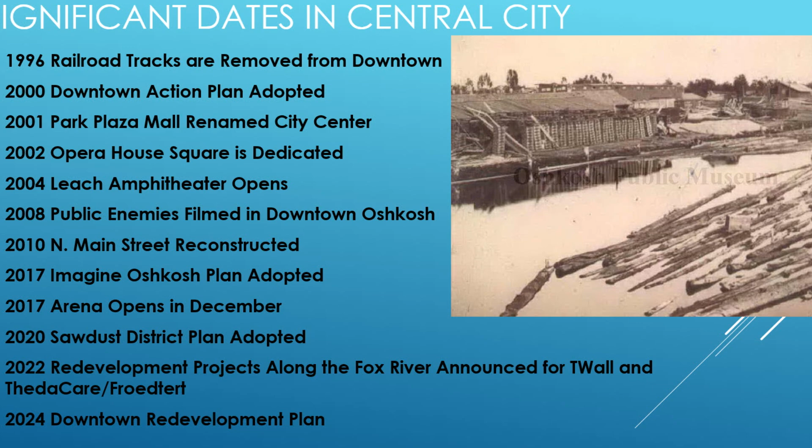2000, that downtown action plan was adopted. 2001, Park Plaza Mall got converted over to City Center, going from that mall to that office complex. Leach Amphitheater in 2004. 2010, the North Main Street reconstruction. 2020, the Sawdust District plan. 2022, some of the large redevelopment opportunities along the river with T-Wall and the hospital location. And then obviously 2024, we're starting this redevelopment visualization plan.

We specifically wanted to look at the successes of the 2000 action plan. These are all projects that were specifically called for in that 2000 action plan that came to fruition, which has led us to wanting to do the new plan. We've accomplished a lot of that old plan, and now we want to see what are some opportunities for the future. So that plan called for the Riverwalk, and you think about just the sheer amount of work and improvements

that have taken in the Riverwalk. The 100 North Main Block redevelopment, Leach Amphitheater we talked about. That Marion and Pearl redevelopment area, after almost 25 years, most of it has been redeveloped from old industrial. Jefferson and Parkway, which you're actually going to have a workshop on later tonight, all the way back in 2000 was talked about the need for redevelopment of that site. Opera House Square redevelopment in 2002. And then again, the hospital location was, 25 years ago, that was called for a redevelopment opportunity.

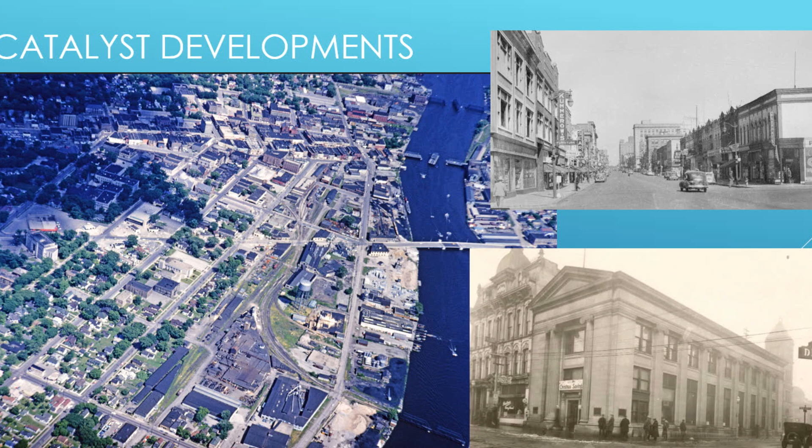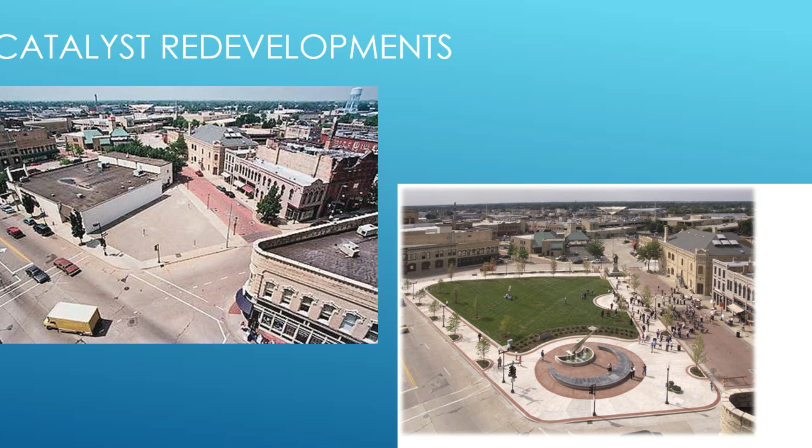Just some catalyst redevelopments from downtown. We're looking at the Marion and Pearl area, the 100 North Main block. What it looked like, in history of Oshkosh versus what it looks like today. Specifically, Opera House Square with what was there with the parking lot in the building versus Opera House Square that exists today. Leach Amphitheater and the utility site that was there versus what's there today with that facility. 100 North Main block, like to talk about what was there versus the building that's there today.

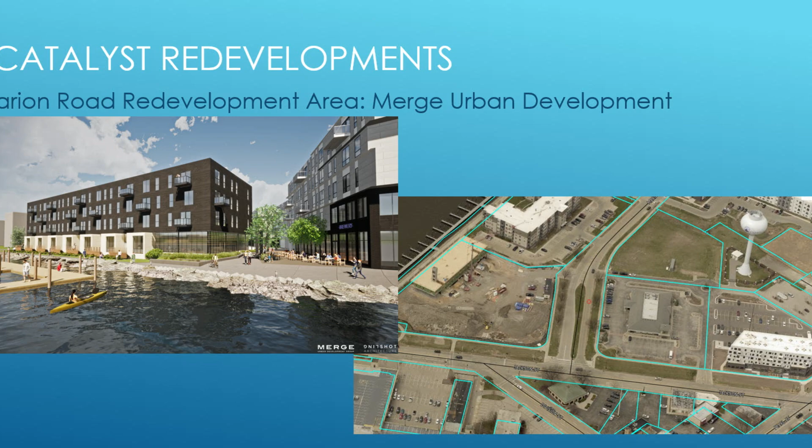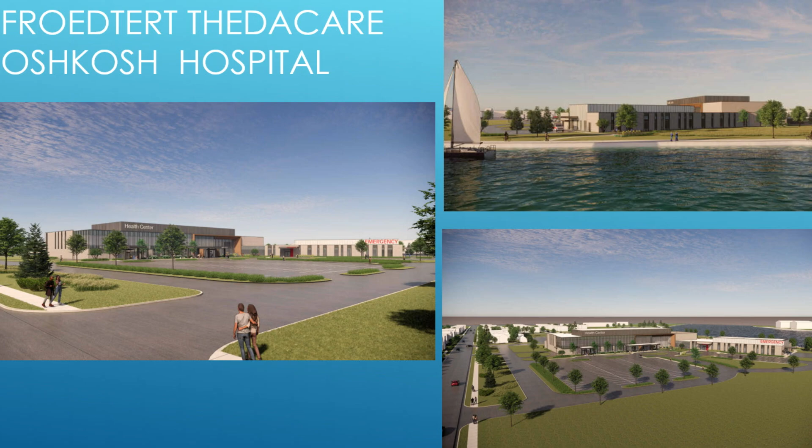This is just a general shot of that Marion and Pearl. Again, it's all industrial versus today. Now a lot of residential development has taken place in those areas. I mean, you can see the coal piles even still there in this photo. And now you've got some of that Merge redevelopment with the Max and Corners building that sits right along the river. You've got the Brio building where the food co-op is further up the corridor on Jackson. Obviously, the Jeld-Wen Door facility that was on the south side of the river versus the ThedaCare facility and Froedtert that's currently under construction. So a lot of redevelopment has taken place since that 2000 plan.

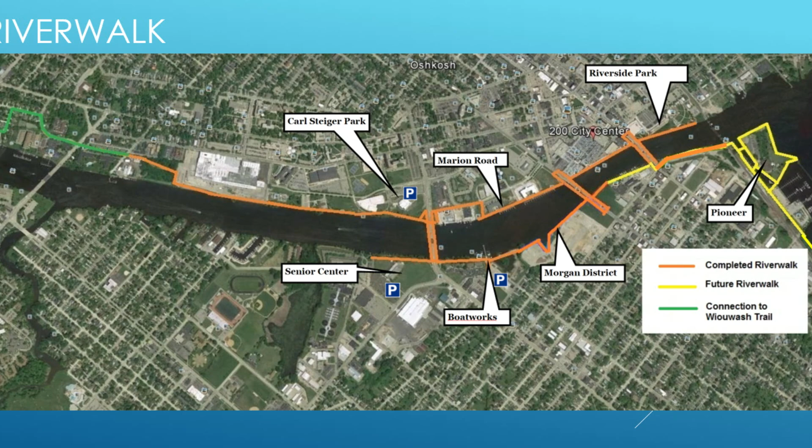The Riverwalk and just the amount of effort that's been made and improvements been made, and we still have a lot to go. The yellow there is still segments of Riverwalk that we hope to construct at some point to further make those connections. A couple of images for you just of what the Riverwalk has turned into. The corridor plan we talked about, this is that Main and North Jefferson that almost 25 years ago called for redevelopment, and that project is presently proceeding forward.

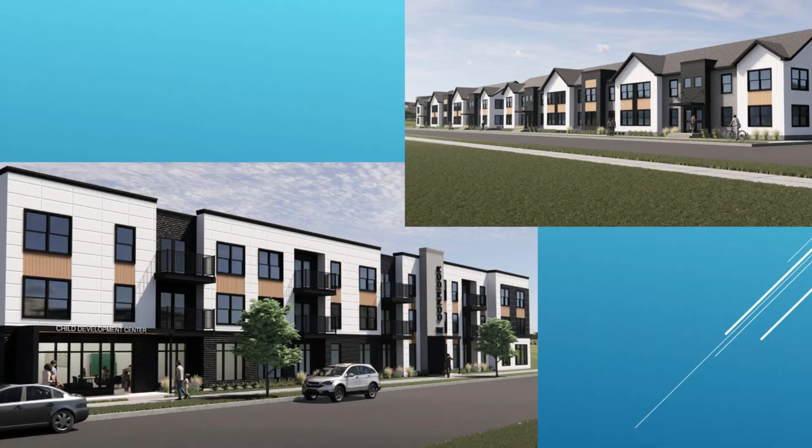And then kind of taking us on to, okay, what are we doing now? So the group came together in collaboration and wanted to look at, okay, how do we take that 2000 plan and what do we show for the future? What's the next set of goals? This is really that. It's a visualization showing, okay, what are some styles and opportunities from redevelopment that could take place downtown? We were looking essentially at the main Jackson area over to where the Leach Amphitheater is, and then north up to about Irving Street. This is the area that was included in the redevelopment plan and that visualization.

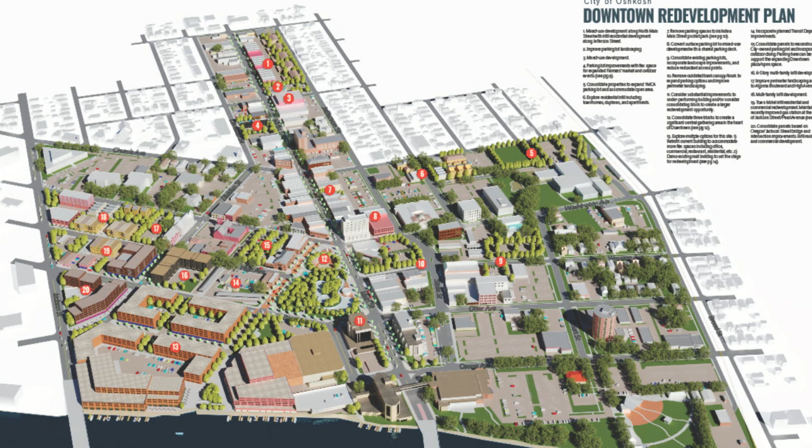This is the main image showing what a revitalized, reimagined downtown could look like. This is not intended to say any one specific of these projects has to go forward in the shape it's shown here. It's really just intended to be a representation of what redevelopment styles can look like downtown. The plan is broken into kind of 3 types of redevelopment that can take place.

Those are from the green sites where it's really landscaping-level improvements. It's taking sites that are very hardscaped, concrete heavy, and saying how can we do some minimal improvements to sites of that nature to make them a little more inviting downtown?

And then it's redevelopment opportunities, like where the corridor is going on Main and Jefferson, or maybe the block just south of City Hall, or some other areas where there's redevelopment opportunities that sit within those. And then it's looking at potential catalysts, and are there areas of

large-scale impact that could have an effect on town if large-scale redevelopment took place. And again, redevelopment doesn't always mean new. Redevelopment can be revitalizing and invigorating what's there today.

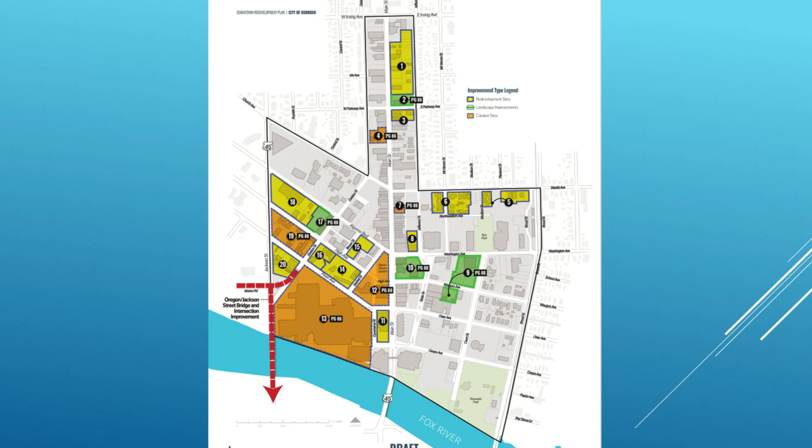A couple of the catalyst sites that really generate a lot of interest shown in this plan are, for example, the expansion of Opera House Square. Discover Oshkosh previously had done the Roger Brooks study, and one of the elements that came out of that study was trying to find a way to have more active space opportunity in the downtown and build a plaza in

the downtown for programmed active activities to take place. This shows one example of an area that could potentially be looked at for that downtown square. It doesn't mean this has to be the location, but it gives an opportunity to put some visualizations out there of what it could look like.

You could have a skating ribbon for in the winter and in the summer. You could have a splash pad. You could have a larger amphitheater. So there's a lot of ways that you can make that public gathering space an active space in the downtown.

To achieve something of this nature, you'd have to buy up a couple of blocks of existing facilities and turn into something. But it just shows that there is an opportunity, if it's something the community and the partner is interested in, to look at ways to add a plaza into the downtown area.

City Center, which is obviously a large development that's in downtown - we talked about the 2000 action plan, how it went from the mall to the office center. And this plan looked at, being such a prominent building in downtown, what are some options you could do if redevelopment was going to take place on that site?

And the plan kind of breaks into 3 options. Option 1, and it could be one of these, it could be a mixture of these options. Option 1 is finding ways to just revitalize or re-enhance what's there today. Continue to be successful in the building as it is.

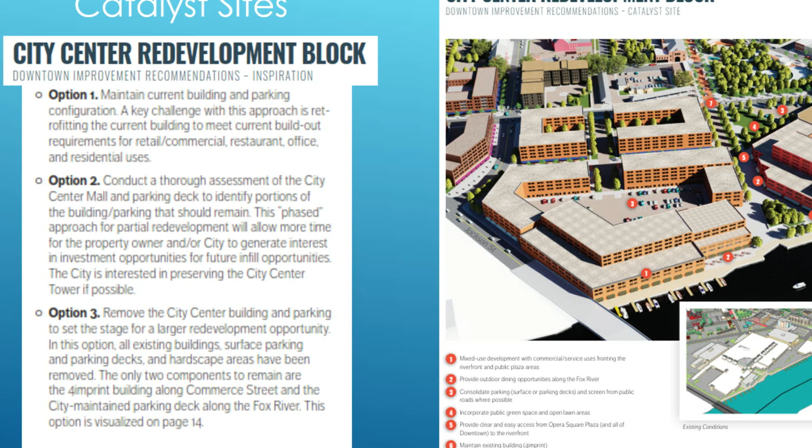None of this is immediate stuff. It's really just saying and trying to identify there are opportunities for the future when they arise, and how do we deal with them when they arise.

Looking at these are some of the landscape improvements the plan talks about - the 600 North Main Street and 300 North Main Street areas. They're both parking lot facilities today that have minimal green space. There'd be an opportunity to add some landscaping, add some green space to just kind of soften the area, make it a little more inviting as part of downtown.

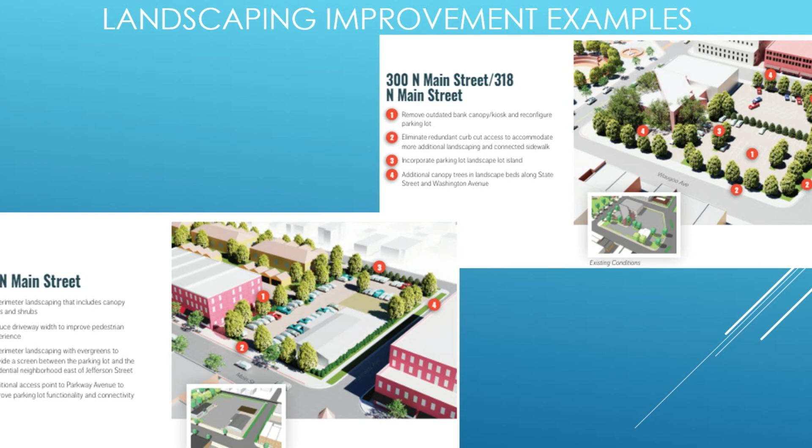Looking at some other redevelopment opportunities or public spaces, one takes a look at that small parking lot just north of Gardenias and says, it's only a couple of stalls, it's not highly utilized. Is there an opportunity that you could convert that to a small public gathering space?

Maybe some seating or something that could complement the downtown. You think on Saturdays, when it's an active downtown, could you have some seating or inviting area for people to hang out downtown? And then, talk about the Town Motel block.

I know that's been a block that's been highly discussed for a long time, and what could redevelopment look like of that entire block? Could it look for more mixed-use office, commercial-style development?

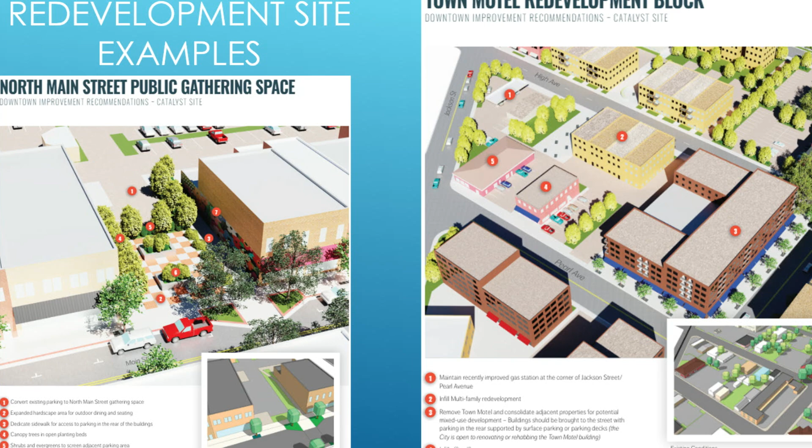So just kind of talking through what's been going on. We started this back in June with presentations on a lot of the partner organizations, the chamber, the foundation, all of those. This got pushed back a little bit just because of timing, but there was a stakeholder group involved at the start that we'd like to present to, see what they think of the outcome of the plan they were involved with early on.

And then it's starting to look at, are there short-term and long-term priorities of the city, of our community partners? Are there projects or elements in this plan that they want us to start investigating further?

And then starting to look at what are those partnerships. If you think about Opera House Square, the Leach Amphitheater, that is an example of a really nice public-private partnership. The city got involved in acquiring the land because the seller wanted to get it to the city. The chamber and the foundation helped fund building what that facility eventually turned into. So where are some similar opportunities for that public-private partnership to achieve some of the goals in this plan?

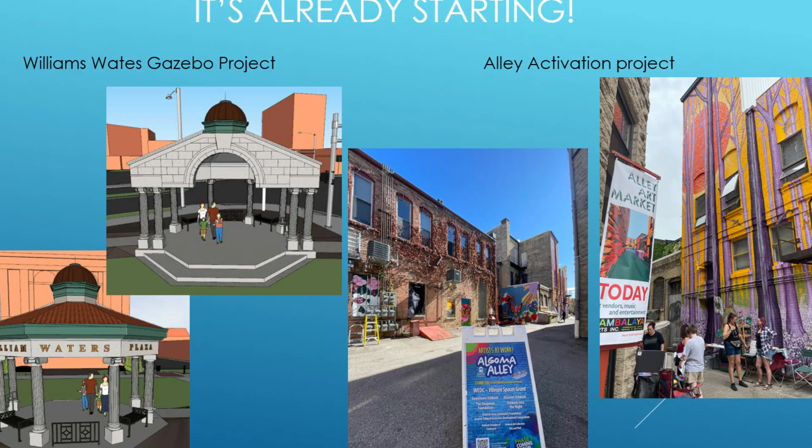Finally, I don't like to end on just what could be done. I want to talk about what is happening. So here are two projects that are already ongoing, kind of revitalizing our downtown.

The first is the alley activation project by the 400 West parking lot. Those beautiful murals were all installed last year. The BID and the business owners in that area are continuing to look at ways to further activate that alley.

Great project that's ongoing. And then one that's close to me is William Waters Gazebo. We've been working on that gazebo being built for years. It is finally under construction. I'll actually have some of the people involved in the project in the audience today that will be helping complete this project later this fall. We had a donor that really stepped up and supplied a lot of money to build that. So it's great to finally see that vision come forward in the city, and it should be a great asset to the downtown.

With that, any questions?

I just have a comment. So this was presented to council a while back now. I know there were a lot of questions that I got after it was presented, and so I've had a little bit of time to digest it. One of the things, I know, first up, it's awesome. I think it's a great job to give us guardrails on what we want to think about as a city. But if you think about the last time this was done, in 2000, it was 25 years ago. So we had things like 9/11 and the financial crisis and COVID that got in the way of that progress, so that takes a lot of time. And then we have changes in technology like the iPhone and electric cars and AI. So I think what's important to point out is this is looking 25, 30, 50 years in the future, and I like that we have those guardrails. So I appreciate all the hard work, and I know this was a big lift. Thank you.

Okay. The staff report is accepted as part of the record, and please report your summary. Thank you. So the subject site is an industrial site at the southeast corner of Medalist Drive and West 33rd Ave. It has industrial buildings as well as storage buildings that are being constructed per a GDP and SIP that was approved back in 2023.

So these darker gray buildings are the storage buildings. The northeast building was recently purchased by Lakeside Plastics, and they would like to install a loading dock on the east side of the building. So the applicant is requesting an SIP amendment to allow that loading dock access and the additional pavement to it.

They do need a BSM to allow reduced setback to 10 feet, where code requires a 20-foot side yard setback. They're also accessing through a neighboring property, and they have provided cross-access agreement information, so they do have permission from the neighboring property to access through there. They are showing additional arborvitae along that reduced setback to buffer from the neighboring property.

Staff does not have concerns with that reduced setback, as it is abutting undeveloped neighboring industrial land that's, I believe, a stormwater pond. They are also requesting a BSM to allow the reduced lighting levels for that maneuvering area. Staff does not have concerns with that lighting level reduction, as it's only for truck maneuvering to the loading dock. There's no employee or customer parking there, so there's really no safety concerns.

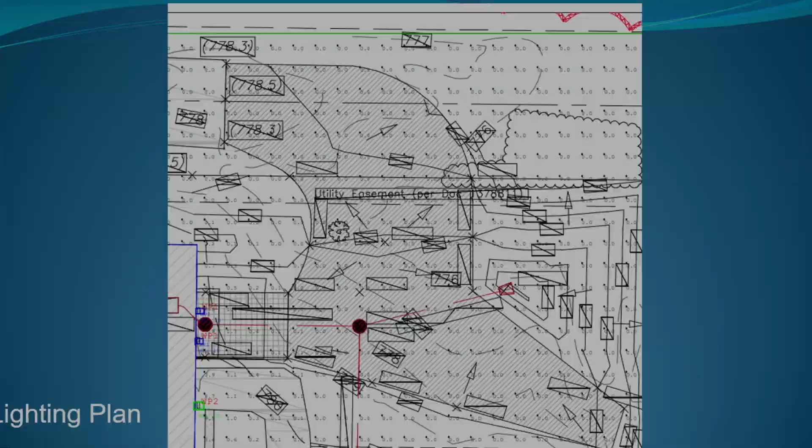Here are the building elevations along that facade. They're just adding 2 overhead doors for the loading dock. Other than that, all the materials are remaining the same and matching what's there. So with that, staff recommends approval of the SIP amendment with the findings and conditions in your staff report.

Are there any technical questions from the Plan Commission? Okay, seeing none, I'm going to open up to public comment and request a statement from the applicant.

If the applicant is here, please approach the podium and state your name and address for our records. Good afternoon, my name is Rick Fisher. I'm with Fisher & Associates Architects. I'm the applicant for the project.

I also worked on the remainder of the site and worked with the development for the other storage units that were built on the site. And so this is a condominium plaza. There's multiple buildings within this overall site. So this particular building on the northeast side has been sold to Lakeside Plastic, which is the adjacent property owner. So this is an extension of their operation.

So as part of that, they wanted to build a new break room space and some other interior alterations, and then add these loading docks.

So the truck maneuvering is not at all anywhere near the public roadway. And we had looked at several different versions of the maneuvering space. We wanted to keep the car parking spaces not in the maneuvering space, because trying to maneuver a truck along with the car is difficult. Worked with staff to look at alternative options to make the truck maneuvering work.

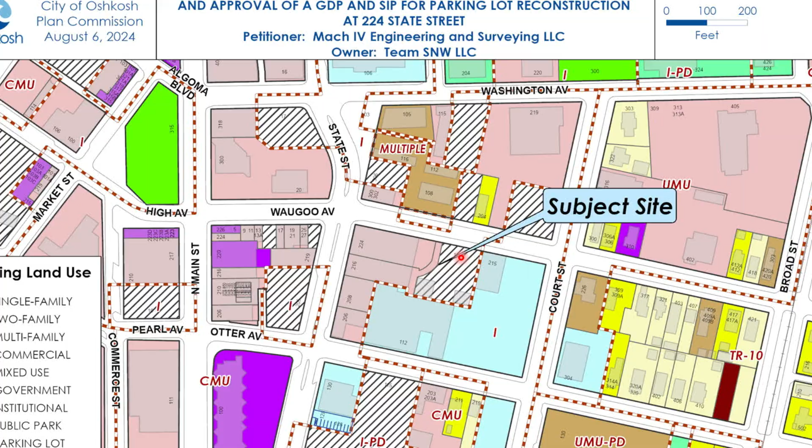So the subject site is located at the southeast corner of State Street and Waugoo Avenue. It has a commercial building, previously the Oshkosh Northwestern building, as well as a parking lot within the site and 2 garage buildings accessed off of Waugoo Avenue. Here's a view of the site.

The applicant is requesting a rezone as they are requesting to reconstruct the existing legal non-conforming parking lot. They're currently in the process of renovating the site at 216 to a restaurant, with future plans for a hotel above that restaurant and on the neighboring building to the north. So they do need that parking lot for the new users.

As the site currently has a legal non-conforming parking lot, to reconstruct it they will need BSMs, so they're requesting that rezone to add a planned development overlay. Staff does not have concerns with the PD overlay, as it will allow them to provide needed parking for the site.

Here's the site plan they provided. It has 31 parking stalls. They are requesting a BSM for a 0-foot setback along the south and east property lines, where code requires a 5-foot setback, and they're providing a 10-foot setback along the front property line, where code also requires a 5-foot setback.

Code also requires a 10-foot buffer yard requirement along these property lines, as it's abutting institutional zoning. However, the applicant is requesting the 0-foot setback. They feel an increased setback to 10 feet from the right-of-way is more appropriate in this case, as it's abutting county buildings, basically right up against the walls of the neighboring buildings, and that would also be difficult for plantings, as it may run into issues with buildings up to the lot line.

So they are requesting the increased landscaping along the front property line instead. They're also requesting a BSM to allow parking row ends without landscape islands, as that would limit their ability to provide the needed parking stalls and maneuvering.

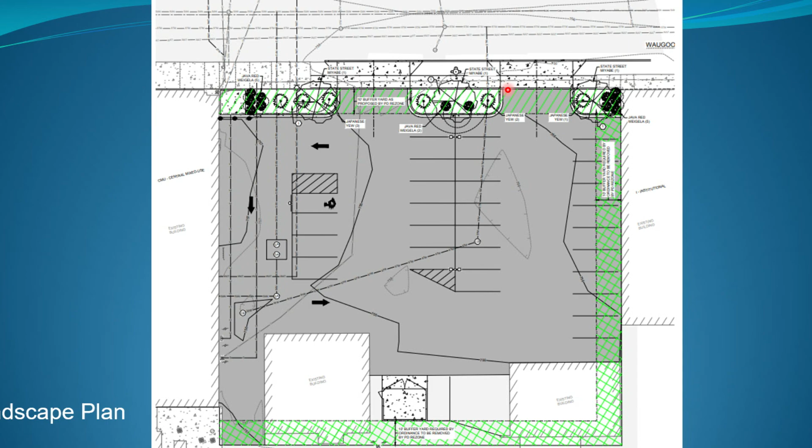Staff is supportive of these BSM requests, as they are providing increased landscaping and increased setback along the right-of-way that will enhance the view of the site from the public right-of-way. So with that, staff recommends approval of the rezone, GDP, and SIP with the findings and conditions in the staff report.

Okay, Plan Commission, any technical questions? I have one.

Is the parking lot here sealing in something? Yes, this is a capped DNR environmental site, so we largely need to maintain a cap here. So this was a fine balance, trying to work with the DNR and the applicants, figuring okay, it's capped, we need to keep it capped. How can we make some improvements and get a nicer, built-up parking lot and get some green space added?

So would that preclude recommending permeable pavers in there anywhere? I would want to work with the environmental consultants to see if that's a viable option, given that it is a cap site. That is typically not done in cap sites. Okay, I just wanted to make sure you'd figured that I asked.

Is the building to the east right up to the property line? Yeah, the county building is pretty much right tight to it, shown here, basically right at that property line. And same thing to the south, that building's pretty much right tight to the line as well, and then the parking lot that way. Are they keeping the existing garage that is there, and is there another building on the corner too? The two existing garages. Okay, they're keeping both of those?

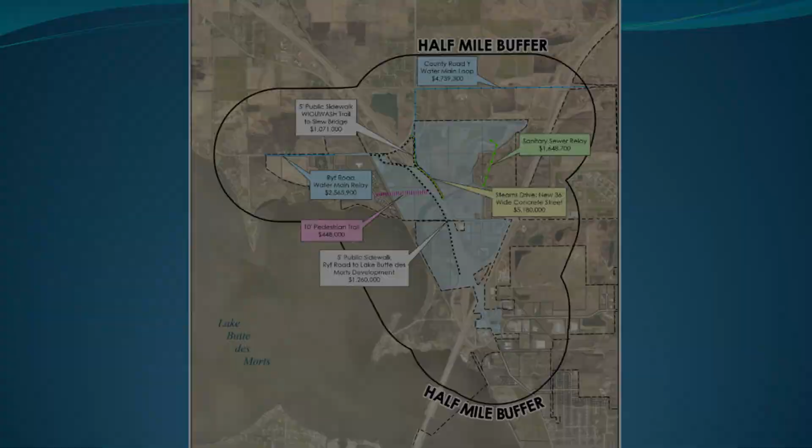It does include improvements within a half-mile buffer, which state statute allows, and that is really to get that water main extension so water can service the development area. Just some of the areas that we know right now are not developing and could develop in the future - again, that area on the northeast side where there's potential commercial development along with multifamily and single family, that industrial area briefly on the south side, and we already have the multifamily project that's going on that southwest side.

So that's the boundaries. The project plan, let me get my computer to turn back on here, sorry.

Identifies approximately 44 million in potential infrastructure improvements that need to take place in that area to unlock full development potential. We estimate at this time that if full development took place, the overall value within the TID could be about 162 million within those properties.

Again, the TID is only within the city. There is no property outside of the city included in the TID, so there's no impact on town parcels. This is a city-initiated project, and TID can only be within property within the city.

Being a mixed-use TID, it has a life expectancy of 20 years. That is the statutory maximum for a mixed-use TID.

Proposed TID is consistent with the comprehensive plans, and I like to always talk at Plan Commission. Remember, when this body is looking at TID, it's looking at it from that context of land use, and is it appropriate based on our comp plan and our long-range plans for the area.

The TID does include a potential for development incentives for developers in the future. However, none are identified at this time. The project plan does not approve any development incentives, so if somebody wanted to do development incentives in the future, they'd have to go back through council and approve a but-for.

Although it's a green line on here, it doesn't mean that's exactly where that would go. We own 62 acres there, so the chances of it cutting through our property right now would be quite high, correct? Right now it ends roughly here, correct?

So if that is going to be extended, and it's going to go, that is going to have to be conversations. You would have to agree to it. If not, we would have to find another opportunity.

So the TID in and of itself doesn't just allow it through your property. So we as property owners would have the right to say we don't want you there. Correct. It's still your property, and those rights are held with you.

That was kind of a concern because we mow 15 hours worth of grass every week, and I was like, oh, what are they going to do to my yard? That is a conversation, and if you disagree with it, it'll have to find a new home. Okay, sounds good. Thank you.

Thanks for allowing me to speak. I'm Jim Erman, I chair the town of Oshkosh, and I'm fielding a lot of calls. People are confused on this issue here.

The TID district is the blue up there on your map. And what's the, according to what I read here, you're changing the

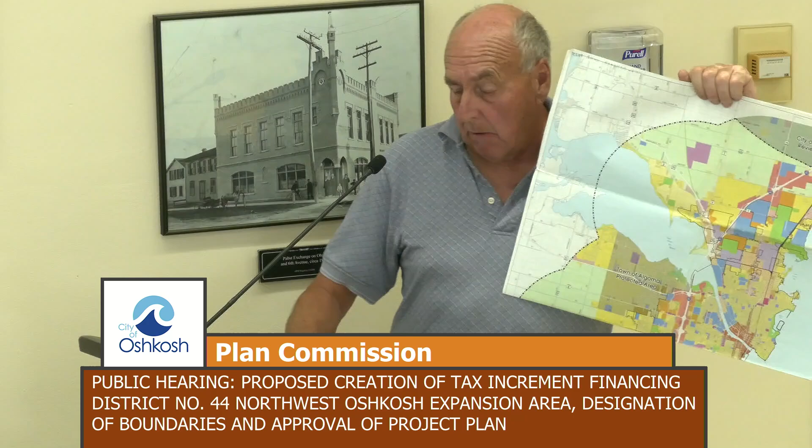So if it, right now, this was an agreement with, this is the city of Oshkosh's comp plan, the town worked with us and took a lot, we worked hard on this. Yep, I was there. You took the town's plan into it a lot.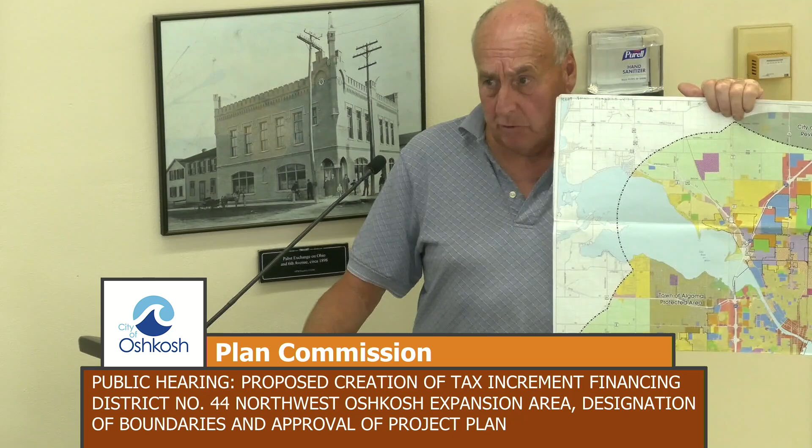So in the future, then this comp plan for the areas in the town of Oshkosh are not gonna change from types of residential to industrial, commercial? Nope, okay. Comp plan will still do its normal thing. This is separate from that, and if someone wants to change any areas in the town, it'd have to go through that normal comp plan process and discussion.

You gotta change the comp plan before you change the zoning. Correct, yep, and this doesn't affect zoning. A TID style is separate from comp plan and zoning. You're just saying that right now, it recognizes there are residential and some commercial and industrial there, so that's how you're getting this TID. Yep, that's the mixed use style, because there's land presently in the city.

Not changing the land use at this time. The other thing here is, I say, well, this makes it so, like the 500 apartments there now, oh, they're gonna help pay for this, because when that development comes in, those taxes won't go to the general taxes, the improvements there. What is it gonna be? You said potential, what, $100 million here for the 500 and some apartments that are going up?

So conservatively, the estimate is 162 million for the entire district. Okay, could be. Now, those apartments that are going up right now, as that improvement comes in, that money will be going to help pay off the TID because it's within the boundary? Correct. Which is all great, so that'll get paid off.

But the tax is hidden in the concept. That money from the taxes that are on that new development there are not going into the general fund for your schools and everything else.